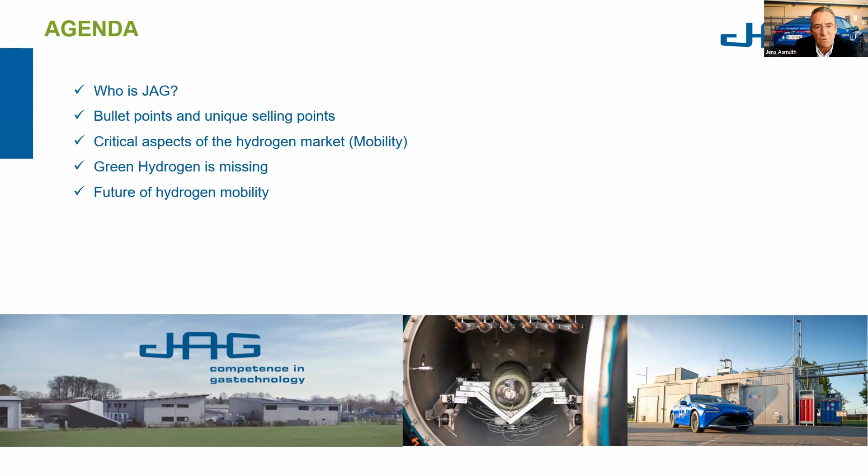We were founded in 1989 by myself and an English organization. We are located in the north of Germany, near Hanover. Our mission is we deliver everything from a single source. That means we offer the planning of a system, the safety approval, the installation, the automation. So we are real system realizers.

Our history comes from the automotive industry, and we built for many, many years emission calibration gas systems. But as you know, combustion engine technology is not a moving point at the moment. So since 2014 we started to move into hydrogen applications. We are right now around 120 employees, with 10 to 15% growth per year, and around 50 million euros in hydrogen sales this year.

We are a company where innovation is the biggest driver. We're realizing projects, modifying projects, modifying products. And we have winners in this category. In Germany, we are one of the top 100 innovators for several years, and we are also members of the German Hydrogen and Fuel Cell Association.

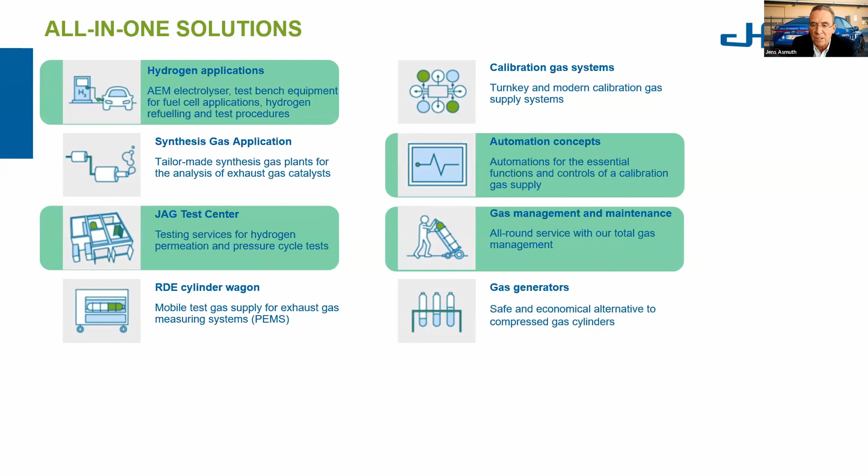We're also testing hydrogen systems, for example the same we do with electrolyzers. Automation and digitalization is also a big issue, but we also deliver after-sales service for our customers. That means we don't leave customers alone with a system. We build the system, and later on we also service and maintain the system for these customers. This is also critically important.

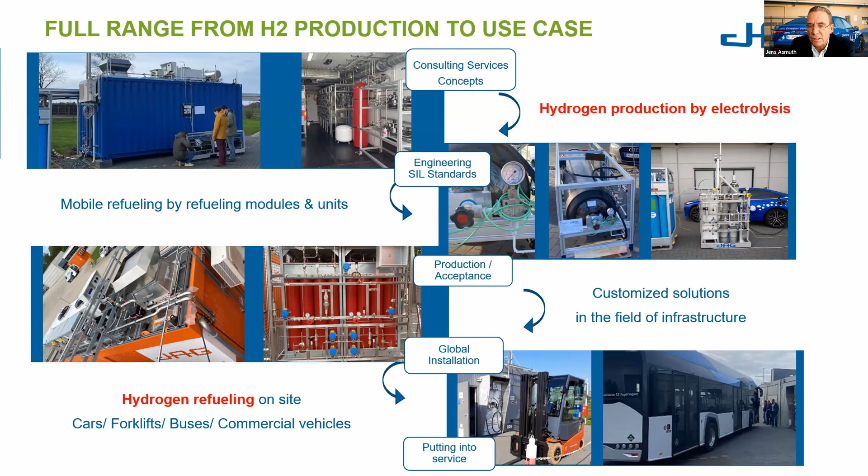Let me give you pictures from realized projects. In this market, you have a lot of players who only show you drawings, but we say we have to show the market - we are a bit more upfront. We have realized projects, and you see a couple of AEM electrolyzers in the first pictures. We also build tank systems and filling concepts for this kind of industry. At the end, you see on the bottom pictures vehicles which we filled up at our facility to put them into operation. So we are needed for this industry to realize projects.

We also build high pressure testing applications. We have test centers to test high pressure tanks up to 700 bars, consumption testing, end-of-line applications, and also aging tests for electrolyzer stacks, which we heard about before.

We are fans of decentralized applications, for example hydrogen filling stations together with green hydrogen electrolyzers for 350 bar and 700 bar applications, and building cost-effective fleet owner solutions.

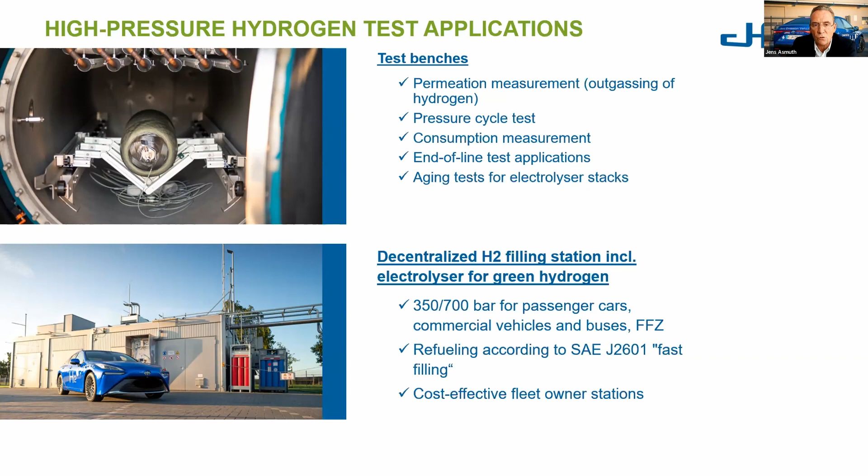We also have a big project with customers. They know there is still an infrastructure problem in the market about refilling trucks. Trucks have a big need for hydrogen per filling of a heavy-duty truck - we're talking about 60 to 100 kilogram hydrogen filling. There are not enough filling stations in the countries, so we build mobile solutions which allow fleet owners to fill up their own trucks at their facility.

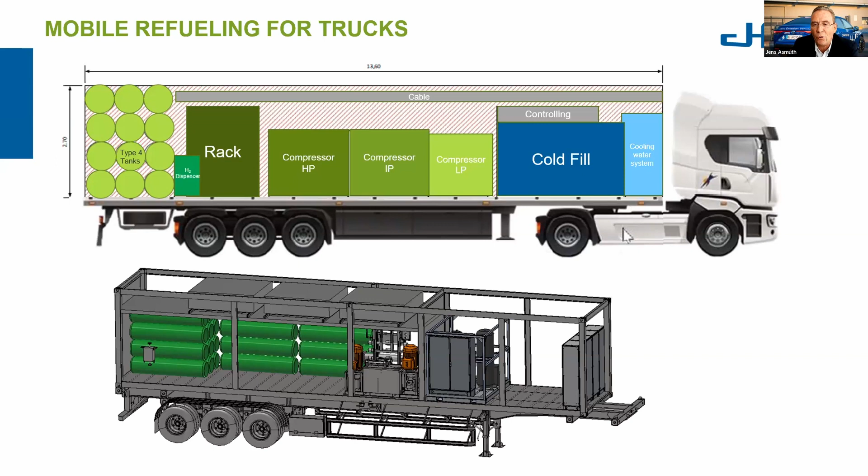This project is at the moment running for us, but I can't show you real pictures of that - it's not allowed at the moment. So I'll show you a drawing in this case. You saw this picture before from Enapter. We are a partner of Enapter building AEM electrolyzers. At the moment, we have built a large number of electrolyzers, and they have been running for a couple of years.

So we have electrolyzers in the field. They have now more than some 1,000 hours on the books, and they're still running good. So we can really believe in this kind of technology for us.

And they can be optimized, of course, and this is what we also see happening in the next couple of years. We see a lot of developments in these kinds of products, and also we will see a lot of price reduction in these kinds of products.

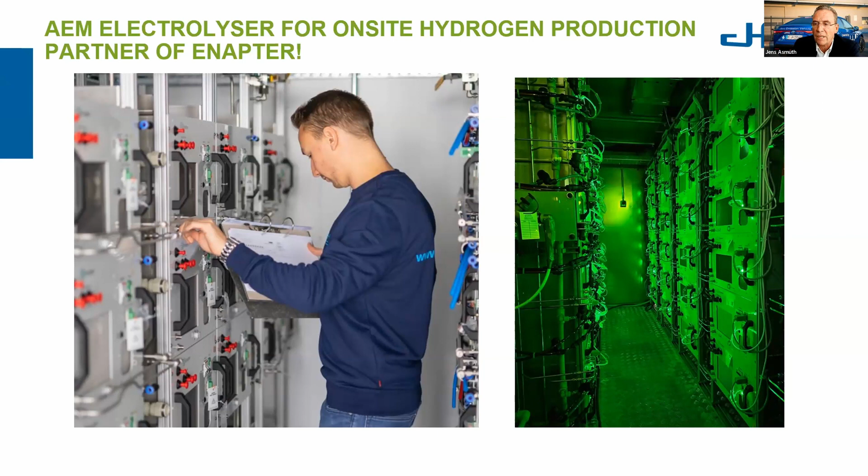This is another picture which shows you an application combining an electrolyzer and multifunction filling of 350 bar forklifts, for example. This is a prototype container which we deliver at the moment to customers for rent, so they can use this kind of system as a showcase in front of their facility if hydrogen usage is really an option for them.

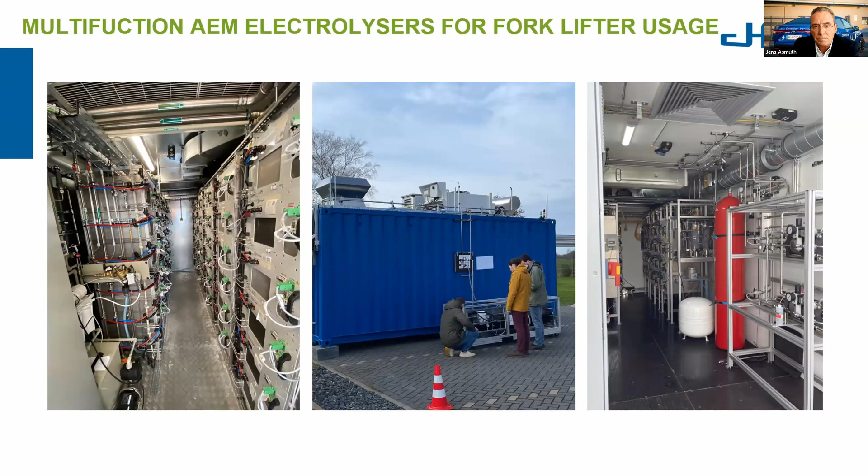Another picture, what you see here, it's built in the south of Germany. It's one of the famous projects where we have a test center where everything required is present, big compressor systems to fulfill the requirements, and a large hydrogen storage. The green stacks show you that everything on this facility is really running with green technology, and we scale them up with AEM electrolyzers.

A little word about AEM electrolyzers from our side as well. We talked about aging, we talked about how you replace systems. All these customers require 24/7 usage for their applications. For every downtime, they have a problem. With the AEM technology, we are able, with these small stacks, to run part of the system while still ongoing.

And we replace other ones for maintenance and service. This is one of the big reasons why AEM has a big advantage in our understanding as well. To change a PEM stack in an electrolyzer means you have at least a 1 week downtime of the system, or you need to build up some kind of backup.

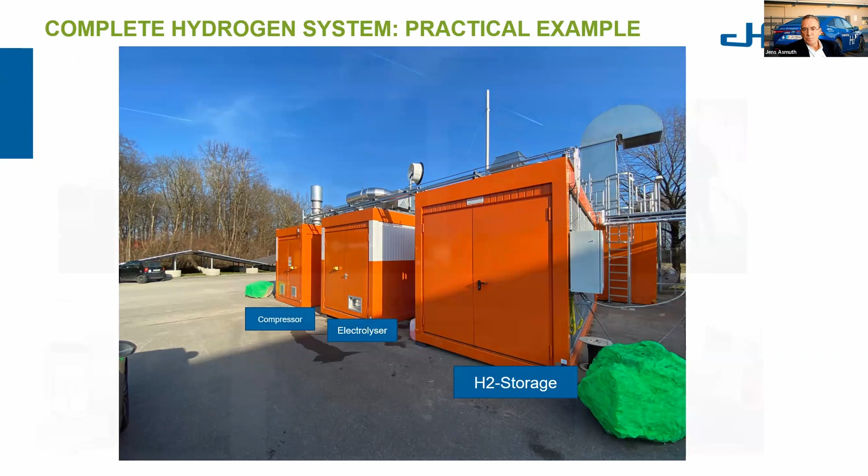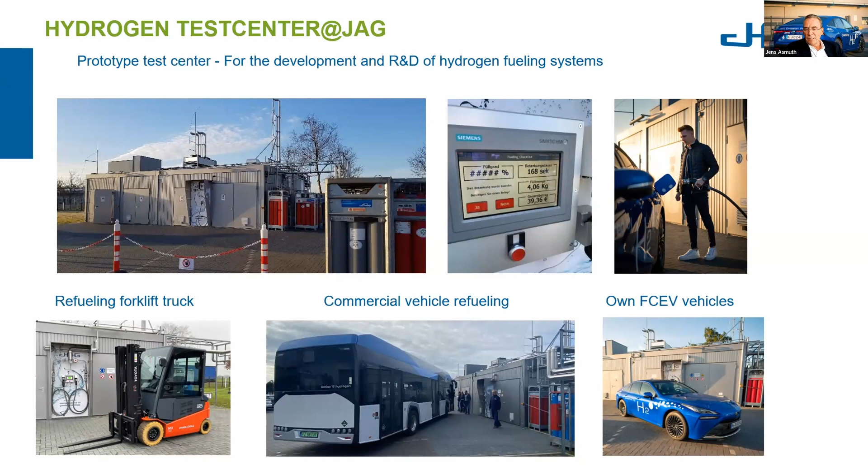So this is our prototype test center, which is located here in the north of Hanover, where we're testing components and where we allow really fast filling of hydrogen. We have our own fleet of fuel cell application cars, and we also allow prototype testing of forklifts, buses, trucks, whatever comes up.

So we also like to talk a little bit about our bullet points on JAG. JAG is one of the key players in the hydrogen R&D sector in Europe. We have already supplied products and service in more than 80 projects all over the world, mostly automotive and aerospace applications. So we're not looking at steel or chemical applications, there's too much to do for us. And we are experts, for 30 years, in gas and fluid technology, which we deliver to the market.

We have in-house, and I'd also like to announce this a little bit, you need experts for this kind of technology. You need engineers, you need people who have an understanding of how you build the systems, and we have them available, and we build the systems with our employees. They are very well prepared in hydrogen technology.

JAG is a perfect player and partner to realize non-standard green hydrogen projects. That means we're not interested in any kind of standard applications, what we build day in and day out. We're really interested in projects where we build unique systems and where we optimize them to the next step. This is one of our main drivers.

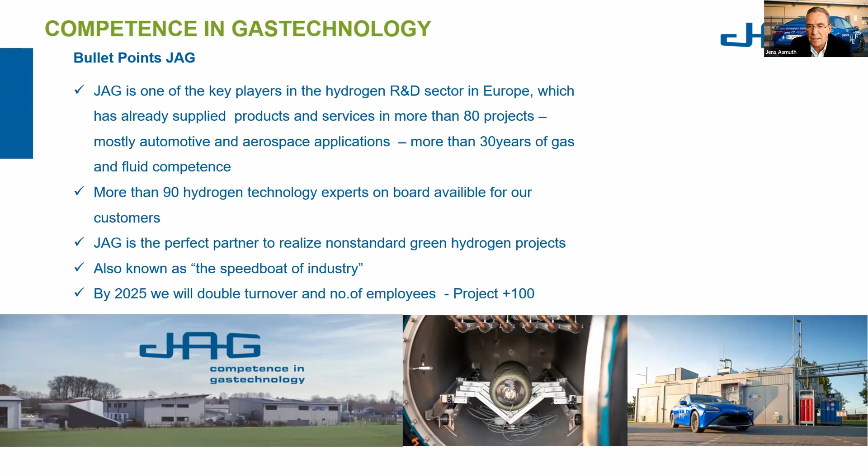85% of our sales is actually based on hydrogen demonstrator projects. So this is critically important. Before you ramp up all these nice requirements, what we heard before, how you get the market running, you need demonstrators. Customers want to see how these systems really run.

They want to get an understanding. Everybody knows now there is large growth in this market. We have an extremely high potential of inquiries, and we can really say that in the next 10 years, there is not enough production capacity in Europe, the US, and the Canadian market as well, in my understanding.

We already have 80 million euros of inquiries which we cannot deliver. So that means we really pick up the kinds of projects where we think they are interesting for us and which have the highest margin, to be fair. So this is where we heavily focus.

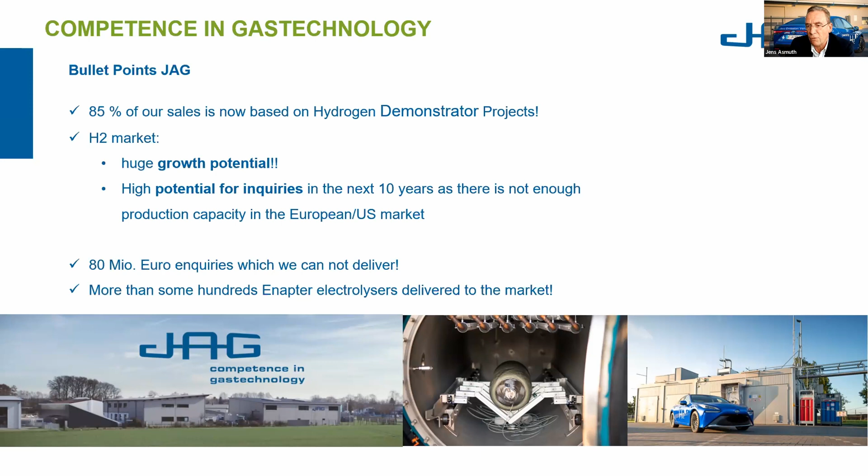As I said before, we have more than 100 Enapter electrolyzers delivered to the market, and we are quite happy with them, and we run as a partner for Enapter to operate these kinds of systems.

I'd also like to show you a little bit about the critical points of the hydrogen market. We can see all the advantages, but there's also something in the market I'd like to point out from a critical perspective. First, there are a lot of players in the market who think they are experts. But if you have less than 3 years experience in this market, in our understanding, that is not really an expert.

Not all players which we see actually in the market will survive in the next years. Some of them are already too late, especially in the automotive industry, where they're not acting quick enough for these requirements. And we heard this before, the chicken and egg problem, and part of that is in the automotive industry.

Several projects which we see at the moment will have a problem with permits, and they are already short on budget. One reason is the big price increase in the last 2 years. We see a real problem when you have financial approval for a project, and then it runs 12, 18 months before realization, and suddenly there's a price problem on the table.

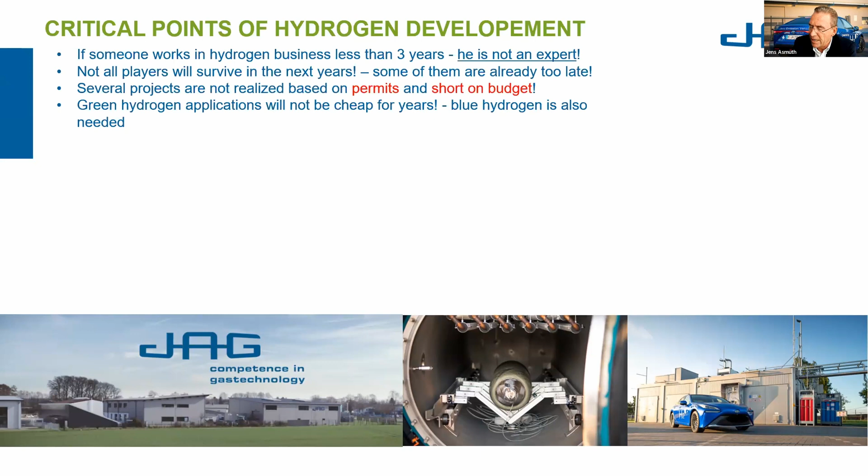Green hydrogen applications, we believe, will not be cheap for years. The reason is nothing is standardized. And before that happens, we expect blue hydrogen is also needed. Blue hydrogen will be cheaper in the next years before the price for green hydrogen comes down.

For economic hydrogen projects, we need a power price of 6 cents per kilowatt hour, from where you can say it makes sense to achieve a hydrogen price of approximately 5 to 6 euros per kilogram. So that gives you a picture of where we realize the projects and the experience behind how that has happened.

We have 2 possible projects in our scope for the near future to grow this business. We like the idea of delivering mobile electrolyzers for rent or pay-per-use concepts to help the market grow. This has a low permit requirement and allows fast installation. If we do this only for Germany, we're talking about at least 10 systems a year with a volume of 1.5 million, meaning an investment of 15 million is required to run this kind of project.

A second project we see is on filling solutions for hydrogen, also built on mobile filling solutions for mobility and aviation. If we deliver 10 systems, depending on size—heavy-duty trucks or smaller cars—we're talking about 2 to 4 million per project. So this can be something like 20 to 40 million euros, which is a project for us to grow at the moment.

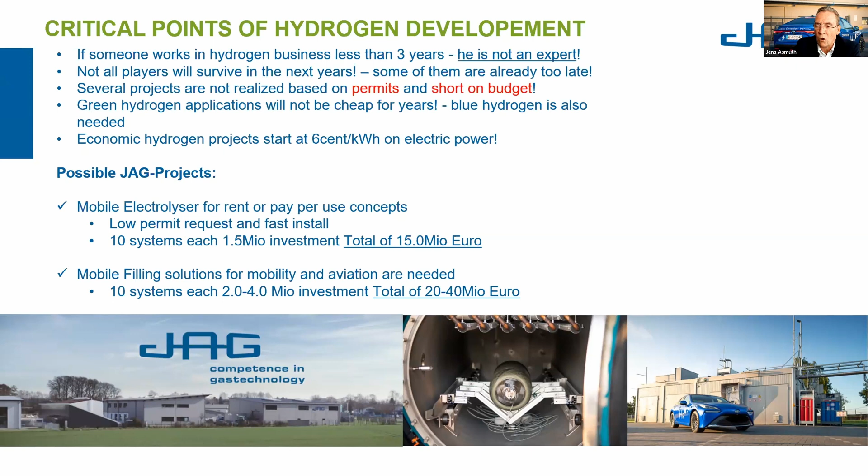There's no way out—we need green hydrogen, so we will have a real focus on electrolyzer systems, and they need to be implemented in the market quickly. Germany and Europe will be an important market, but we also expect we need local, on-site, decentralized solutions to deliver this to the market.

If you see the costs at the moment on mobility filling stations of 12 to 13 euros per kilogram, there's not a price decrease. In previous years we had a price of 9.50, so that means there's still a price increase per kilogram, which is not good for growing the market.

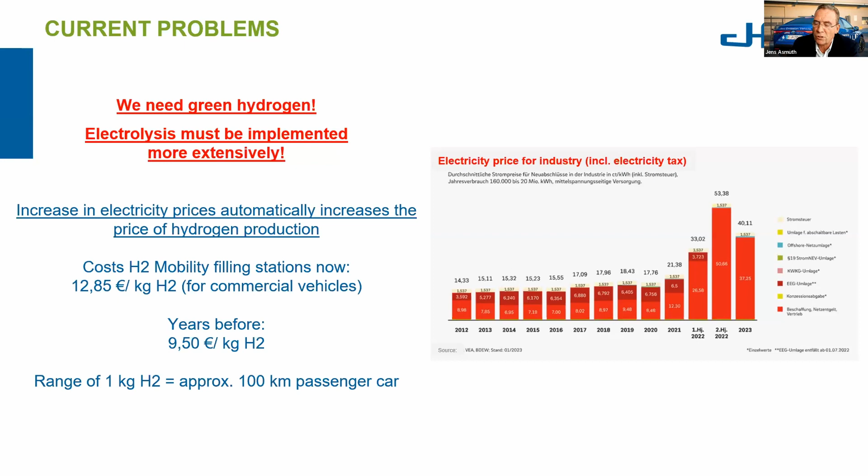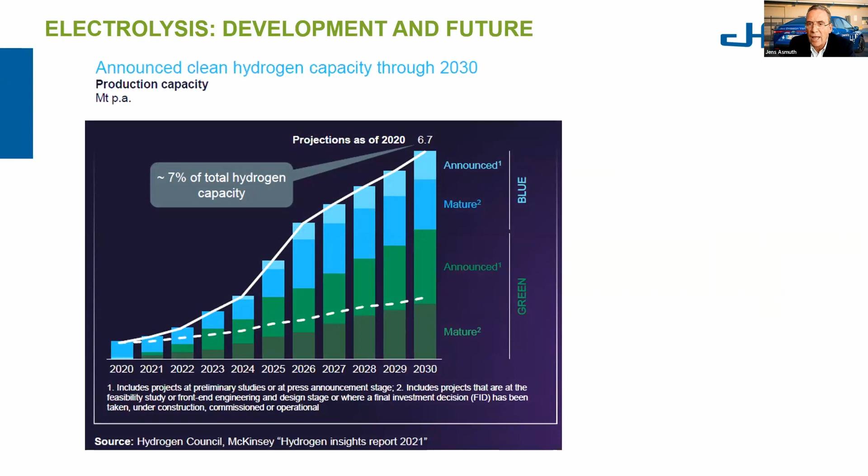There is also a big need for hydrogen because a lot of users and customers are asking for 1,000 kilometers of distance as a must. This is important for infrastructure—it cannot be built quickly enough to have hundreds of filling stations in place in the next couple of years. So to help the market and this technology, vehicles must support a much longer distance, especially compared to battery cars.

A lot of customers doubt buying an electric car with only 400 or 500 kilometers of range available. From that point, we understand this will be a big issue, and we'll see a big movement. We also see the big truck market at the moment, and a lot of applications in aviation and ships—though for ships, I think liquid fuels will also be a big point in the future. We have to put them all together to reduce the required CO2 footprint.